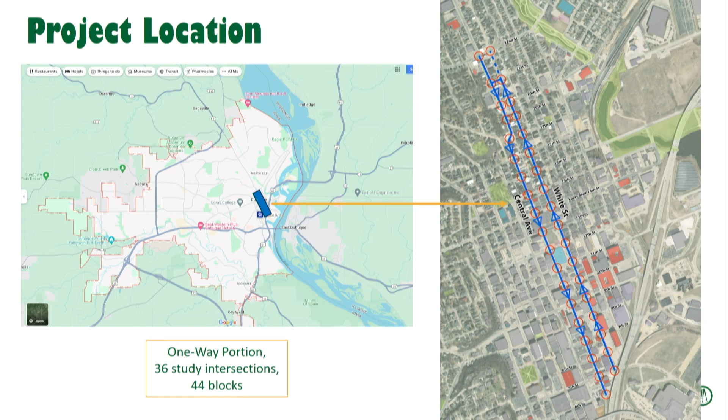In terms of the project, we're two-thirds to three-quarters of the way through. We're in the refine period. This is our work session with you. We anticipate being back in front of you, I believe in mid-November, with a recommended road layout.

So as I mentioned, this is about Central and White going through downtown. We talk about it as a corridor study. And it is a corridor study, but it's a very delicate one in that it goes through your downtown, which is a series of different districts. You'll see as we go forward, we'll describe the north-south cut through downtown a series of different ways. But essentially, it has a southern portion, which is between the Millwork District and downtown, a central portion around which there are several civic buildings and schools, and a northern portion, which goes through a mixed-use urban neighborhood.

And that's really important because as two roadways, it operates, yes, as a north-south roadway, but many people are crossing the street and using the street as much as they are traveling along it. So it's with those sort of balanced uses that this project has to navigate.

So we really think of this not just as two roads, but as 44 or thereabout blocks through your downtown. We think of it as a zipper, a place that can pull together the different districts of downtown. That's how we are hoping to help design this place.

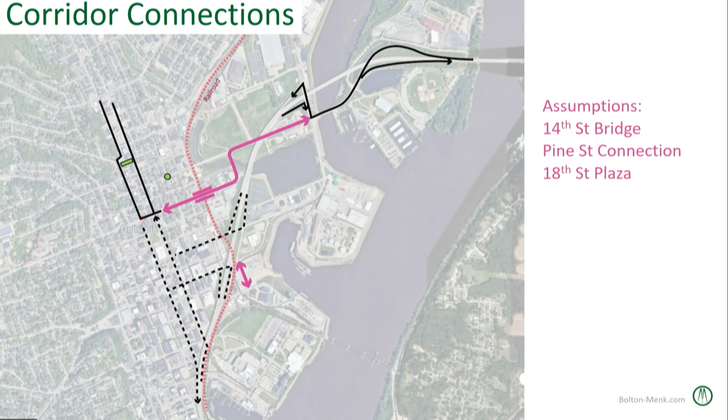The third assumption we're building into this is that 18th Street Plaza will happen. That is the short block between Central and White on 18th Street that is approved in the Central Avenue Streetscape Plan. So that's all modeled in. Those are three of the major assumptions that are in all of the alternatives.

I'll turn it over to Jen.

Thank you, Andrew. So I'm going to talk a little bit about some of the outreach that we've done since we were last here at Council at the beginning of July. We attended some in-person events at the Farmers Market and National Night Out, and we also launched a survey. We were able to engage about 115 people during those in-person events, but the public survey is really where we saw a lot of people weigh in.

The questions that we asked them are: what amenities do you want to see on Central and White? What's important to you? Is it important to have landscaping, wide sidewalks, bike lanes, and what's most important?

One piece I wanted to note here is that we had over 800 submissions to the public survey, which was great. We did ask people if they lived on the corridor or owned a business on the corridor. However, it wasn't mandatory to fill that in. So when we say that we had 43 corridor residents and 32 corridor businesses or property owners, that is of those who told us that they lived on the corridor or had a business or property there.

One thing that's interesting is about 78% of those residents and business owners were north of 13th Street, and 22% south of 13th Street. So just something to keep in mind as we go through this data.

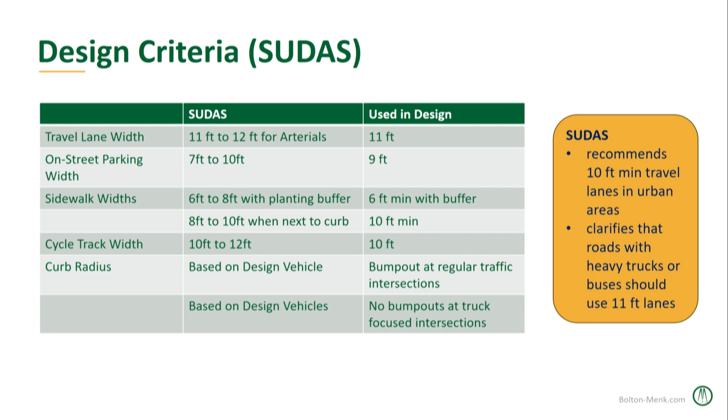So let's dig in a little bit into the alternatives. The first is the multimodal focused alternative. In this alternative, both streets remain one-way pairs. The lane configuration, two lanes in each direction, is like it is today. However, parking is removed on one side of Central and one side of White. This allows for a wide sidewalk with landscaping and outdoor dining to be placed on Central, and a two-way cycle track to be placed on White Street.

You may recall when we were here before, we talked about how, if a bike facility were to be placed on one of these corridors, because of the amount of trucks, that facility would need to be separated from traffic. So what we're proposing is a two-way cycle track, at the same level as the sidewalk. This provides a nice buffer from moving traffic and also gives that wider sidewalk and cycle track area. I'll show you a picture here.

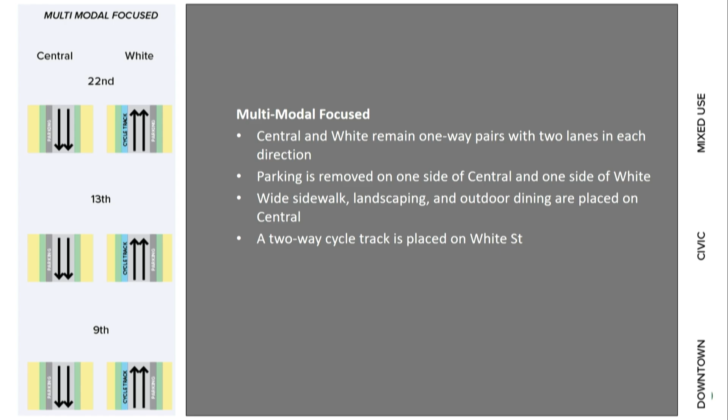Okay, so here on Central, you can see we have wide sidewalks on both sides. One side of parking is removed. You can see we have room for outdoor dining, perhaps public art, and a grass buffer between that activity and moving traffic. On White Street, there's the cycle track, as I mentioned, adjacent to a sidewalk, and then a buffer between that cycle track and the moving traffic. You still have an opportunity for a 10-foot sidewalk on White as well. So this is kind of what that cycle track would lay out. It's a little different—there's room for trees and tree wells in this alternative as well.

Moving on to getting to and sticking around—this is the two-way alternative. Central and White are changed to two-way streets, one lane in each direction, from 4th all the way to 22nd Street. Parking is maximized and present on both sides of the roadway in this alternative, except at a few locations. We found that left turn lanes are needed at all signalized intersections.

With one lane in each direction, if you get one person making a left turn at a signal, they back that traffic up for blocks. So you will need a short left turn lane at those intersections, at all signalized intersections. With the exception of the blocks between 8th and 12th, because there are so many signals and the turn lanes need to be longer, it becomes more of a 3-lane section—one lane in each direction with a center two-way left turn lane. It can fit, but it does remove parking on one side. So it looks a little different between 8th and 12th. Just wanted to show that.

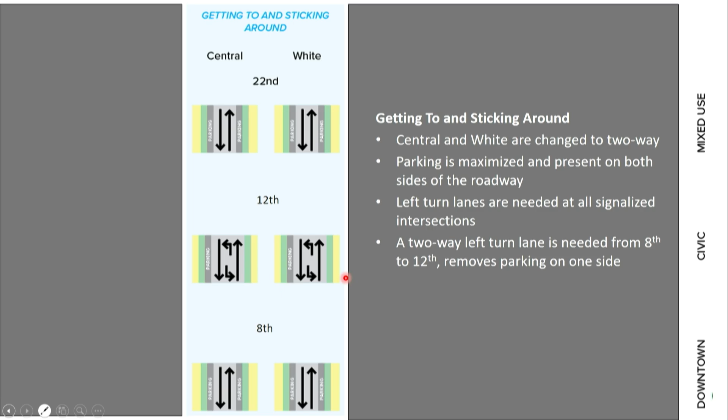So here's what some of those cross sections could look like. The one on Central looks very much like what you saw through the Central Avenue streetscape plan, with parking on both sides and one lane in each direction. You do get wider sidewalks and some trees and tree wells. On White, it looks very similar as well.

I just showed a sample here of a bumped out cross section. If you were to stick with this type of cross-section, you could have the opportunity to pull parking back in a few areas and have a bump out mid-block. Maybe you could put outdoor dining on that bump out, you could put bike racks, you could have a transit shelter, public art—so you're not taking parking off both sides of the road, but at key locations you would be taking parking off in order to have those extra amenity areas with this alternative.

The next is slow flow. Central and White remain one-way pairs with 2 lanes in each direction with parking on both sides. However, from 9th to 4th, the travel lanes change to 1 and parking is removed on one side. This allows maximum amenities to be placed on Central and White. This is also what we found—the traffic volumes are lower in this area between 4th and 9th, so it allows us to reduce to 1 lane in order to maximize those amenities.

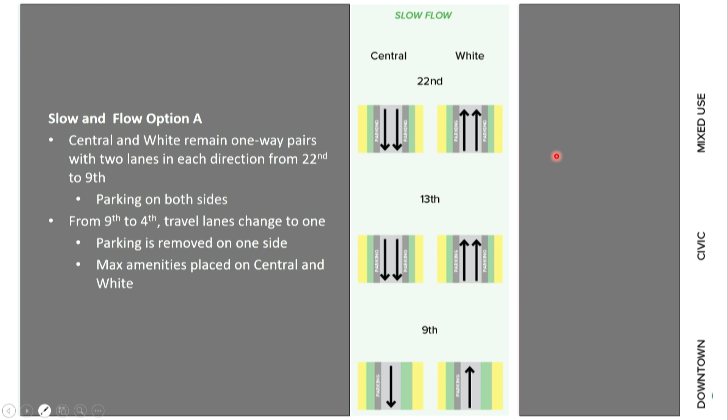That's also that key area, as Andrew talked about, where you're trying to connect from the Millwork District to Main Street, and Central and White can be that zipper, that bridge, and this would be a much easier cross section to cross than 2 lanes. So I'm just showing an example here of what White could look like.

White, north of 9th, would have much like it looks today—2 lanes northbound with parking on both sides—but south of 9th, this could be a wide sidewalk with parking and 1 lane. This wide sidewalk area could also be a cycle track, it could be outdoor dining, it could be more buffer area, it could be many things. Room for transit shelters, whatever that space could be programmed, but it really becomes a very nice amenity zone for those trying to walk along this corridor and cross it.

The last one is different roads and different roles. We tried to take a look at the survey data—in some cases people wanted 1-way, in other cases people wanted 2-way, but the 2-way seemed to be more favorable potentially in the area north of 13th. As Andrew talked about, the land use is different north of 13th than it is south of 13th. So the idea with this one is, what if we did a 2-way street north of 13th, so you could have that circulation, 1 lane in each direction, to help those street front commercial and help the residents in that area circulation.

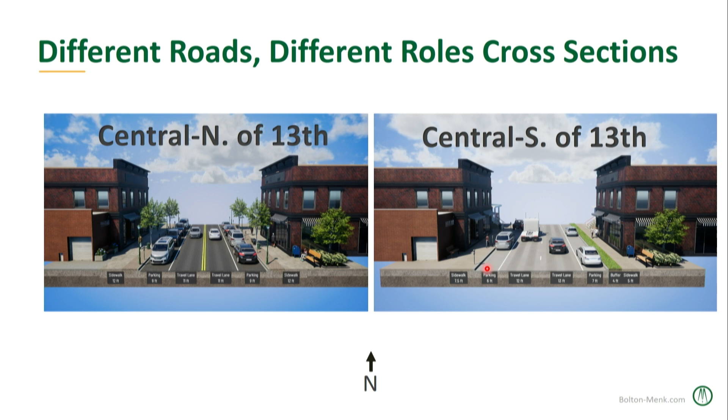Andrew will get into this a little bit later, but with that cycle track I showed earlier, that could be a piece of any of these alternatives. What we're showing you today is how it could generally lay out. However, parking would have to be removed on one side—there's just no way to fit that. So if council or the public decide, absolutely, we want that bike facility, it can fit with any of these. It's just a trade-off of parking, so it's something to keep in mind. Andrew will cover that a little bit later. I will go ahead and pass it over to him.

Thank you, Jennifer. Okay, so I'm going to go through a little bit of the evaluation. Jennifer presented to you the 4 basic alternatives. Our evaluation was based on these 4 guiding principles: safety, economic development, equity, and connectivity.

So we evaluated all 4 based on these. And that's important because this is a place that if it does not achieve economic development, if it does not achieve equity for people using it, it will remain a traditional highway corridor.

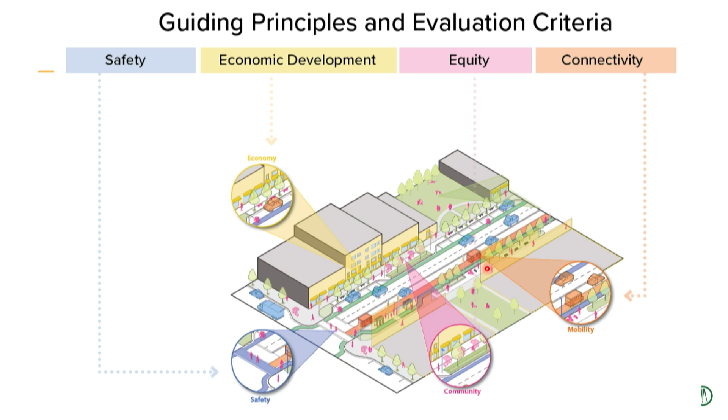Well, the reason for that is that in a corridor like this, in which speeds are relatively slow, when you have conflict points, people are careful. They're more careful than when you don't have conflict points, because people are aware of what is going around them. So the crashes, and in a sense the safety of the place, is actually quite high.

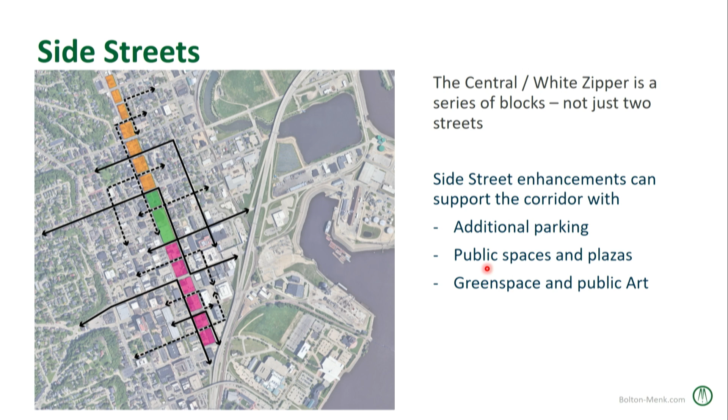Another important finding goes back to the side streets. We've described this area as Central and White, but it's also 22 blocks, and each block has four sides, so two of those sides are the side streets. The side streets can play an important role in the overall development of this area and the management of transportation. As shown in these illustrations, they can add needed parking if desired, plaza space if desired, or green space if desired, all without significant impact on transportation. So with a limited right-of-way, there's always a compromise, and side streets can relieve some of the pressure for things that can't be accommodated within the Central and White right-of-way.

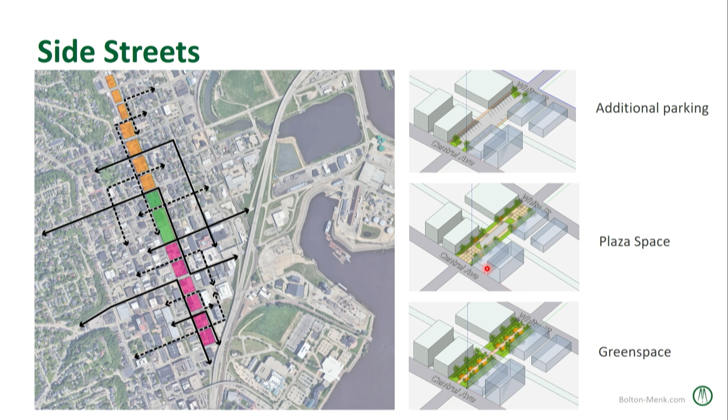When we put this all together, it's important to recognize that these two streets are part of a larger transportation system around the entire city, the state system, the county system, et cetera. This is about reclaiming Central and White primarily for their local benefits. Connections to and across the corridor are just as important as along them, since most users aren't traveling the full length — they're going to a destination or just crossing the corridor. We have constrained right-of-ways, and that is both a blessing and a curse.

The side streets are very important. The plans for 14th Street and Pine Street are really important because they loosen up the need for freight on the lower section of both Central and White, allowing them to be reclaimed a bit more. A north-south bike facility is also important for the city to have. We've described how it can happen on Central or White, but it could also be on a side street — though if it's on a side street, there needs to be a real commitment to that. Finally, all of the configurations we've shown will not impact travel time significantly.

So those are a series of the higher order findings. Next steps, Jennifer?

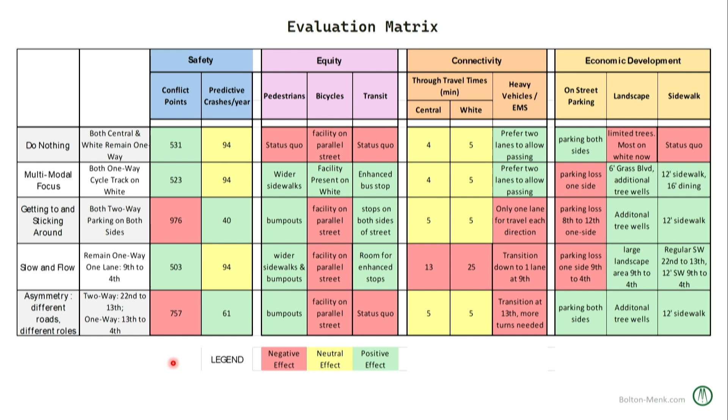The first thing I'd like to look at is the safety section. I'm still a little confused at how to reconcile the fact that the options, the different roads, have higher conflict points. And I understand that you said people are going to be careful, but they also have fewer predictive crashes, considerably less than what's currently happening. So should I be concerned about those conflict points and look more carefully at the predictive crashes, or how do I reconcile that?

Sure. So the number of conflict points is just based upon the number of ways that people can potentially come into conflict or hit each other at an intersection. So if you have two two-way streets, there are more of those points than if you had two one-way streets, because you just have more directions of travel.

However, the research in urban corridors like this one has shown that two-way streets actually have less crashes per year than one-way streets, because people are driving slower with more awareness. So conflict points, yes, they're greater, but in an urban environment, when you make those streets two-way, the research shows you actually have more crashes in a one-way scenario than in a two-way scenario. Okay, thanks, I'll save my next ones for the second round of questions.

All right, sounds good. Mr. Mayor? Yeah, Ms. Farber. So following up on that conversation about one-way versus two-way, I'm very curious, and I look forward to the conversation with the freight teams and the businesses down in the corridor, because it's so unusual that you have residential, commercial, and a truck fleet on the same pathway. So the question I would have is to receive the input from the freight companies, because they are also concerned about crashes. Could you explain, when people try to pass the trucks, what the difference might be from two-way versus one-way on their benefit?

Are you talking about when we would go from 1-way to 2-way and what that would look like in that last scenario? So I actually have a picture of that here. So it does result in more turns, right?

I believe we show that safety improves some with this alternative because you would be going in the 2-way portion, you would get some of that safety benefit. But yes, anytime you have more turns, you have more chance for potential conflict.

Now, if you are on Central already and you're in the 2-way piece north of 13th, you would just continue south on Central. And if you're on White, you would just continue north on White, you're already going north. So there's potential that somebody on White who really wants to go north on Central might get over on 13th now instead of waiting until further up, but they also could continue further up as well.

I know we talked a lot about the model, but the model really showed us that a lot of people really just want to be on Central. If they could go 2-way on Central, that is where they want to be because that's where the things are that they want to go to.

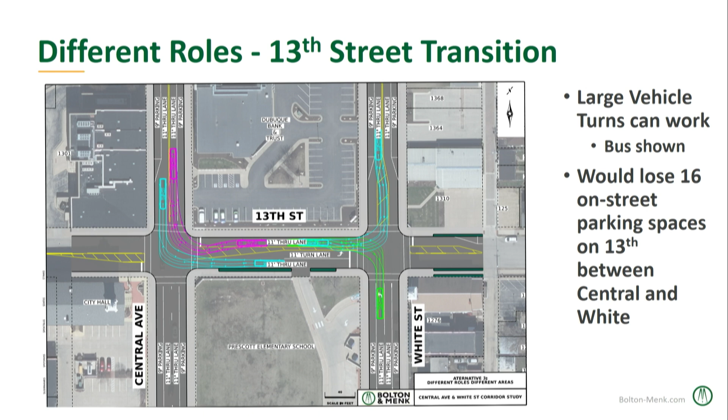So people are on White today because they have to be on White, that's their only way to travel northbound. If you were to make both these streets 2-way, you would see more usage on Central than you would on White. That's just where people want to go. Maybe that'll change over time as things redevelop, but given everything that's on Central, that's just what the model's showing. So, thank you.

Yep. Just one additional question, and Ms. Roussel's through travel time question made me think of it.

The ECIA smart parking DMATs that we're working through, in which we're talking about routing traffic and adjusting traffic based on speeds and automatic lights and how that will adapt our city and hopefully speed traffic through and offer people at certain very busy times, hey, if you take this route, you're going to be 5 minutes shorter than if you take this route. Although it's not fully implemented yet, did you take that study and that program into consideration when you were working on through travel times?

Yeah, I've actually been talking to our technology team at Bolton and Menk, not for the through travel times, but I mentioned maybe some of this imbalance. So take this situation here, maybe we would say to people on White, instead of turning and going north on Central, stay on White and you'll save 2 minutes to get to where you go, or whatever. You could have a sign here that could really help spread some of that demand out and better utilize both White and Central more evenly.

But we do think that technology piece is a key piece of that, especially for the trucks, right? Maybe to make sure they can get that information. There's technology that can sense a truck and give it a special message, so maybe at key points where we have these changes, we would want to make sure trucks are getting in the correct lane to do the movement they want. So yes, technology will definitely be a layer in our recommendations, building upon the great work that the streets plan and everything is doing already.